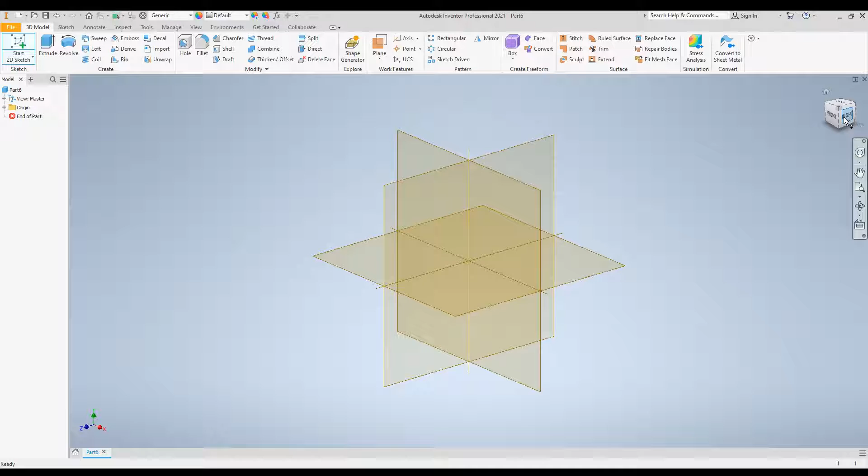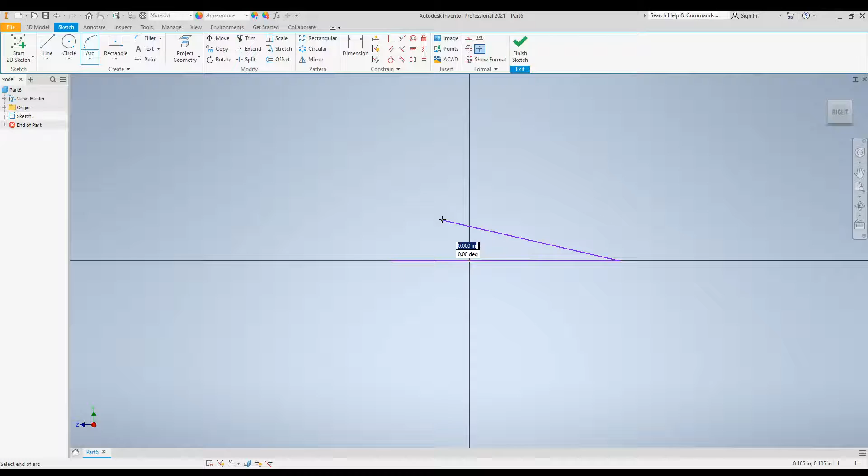I'm going to go ahead and open up a new part, and we're going to follow basically the first set of instructions from the previous video, picking the right or the side view for our starting sketch. And I'm just going to draw a quick side view of a zero camber on the bottom and a positive camber on the top, and I'm not using any particular dimensions because I'm just trying to get the overall shape here so that you can see it. Now when I finish the sketch, notice we just have like the side view.

Okay, now for a tapered or a swept-back wing, we're going to actually loft our extrusion because we don't want it to just go straight out from the center shape. We want it to gradually taper to the shape that we want on the other end. So in order to do that, we're going to have to actually make another plane to sketch on that is offset from the center where we're currently at. So to do that, we're going to come up here to where it says plane, work plane, and we're going to pick offset from plane.

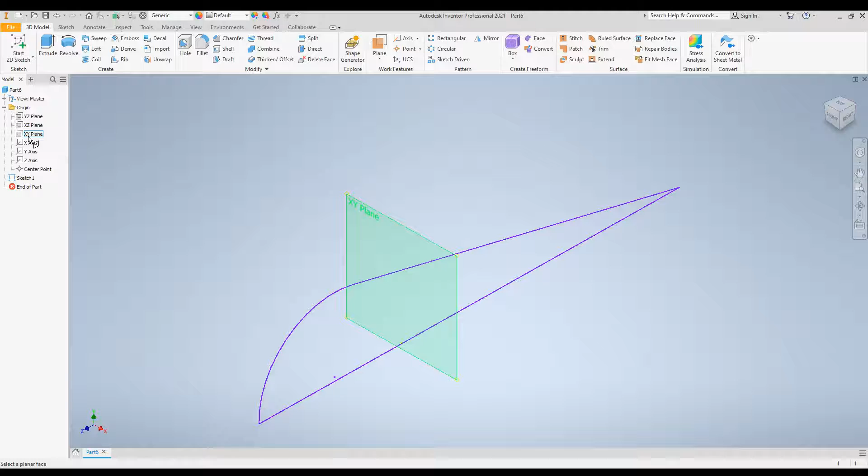Now to pick the plane that we're offsetting from, we have to open up the origin tool here and notice that each of the different planes has a link, a drop down, I don't know what to call these. So we want to pick the YZ plane, and you'll know that's the right one because when you look at how it's highlighted, it's the plane that we just drew that cambered surface on. You can also look down in the lower left hand corner and you can see a set of axes where they've labeled the different axes. So you can see that yes, for the side view, it's the Y and the Z.

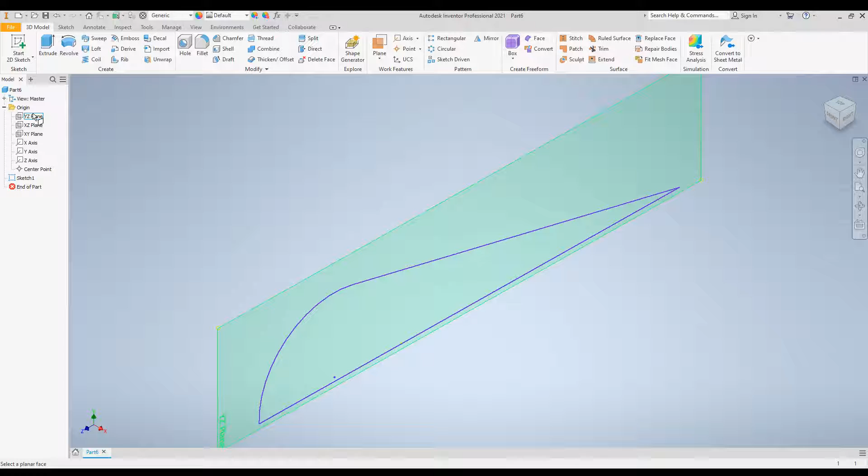So we're going to click on this little box in front of it. Notice that it highlights this thing in blue. And then it's asking us how far over do we want to offset this plane? So to figure that out, you've got to figure out what the distance is from the center of your wing to the very edge of your wing. So half of your wingspan. If your wingspan is 20, you're going to want to offset it 10. It's quick math, but you need to make sure that you're offsetting it correctly or your wing is going to be too short or too long.

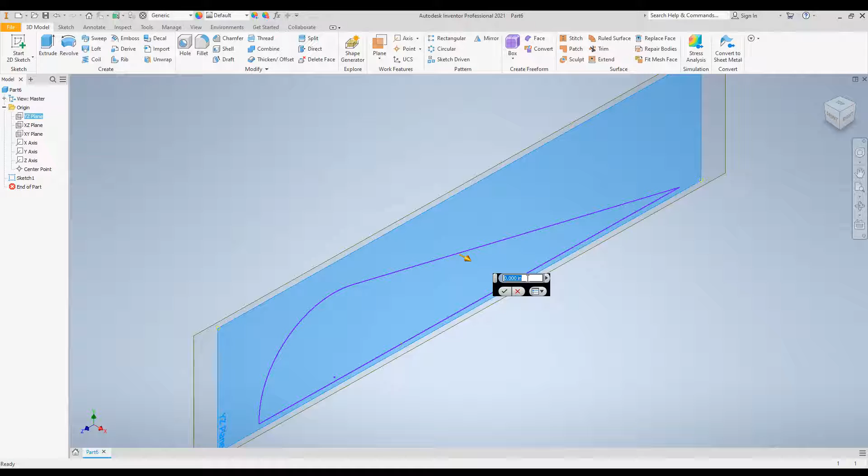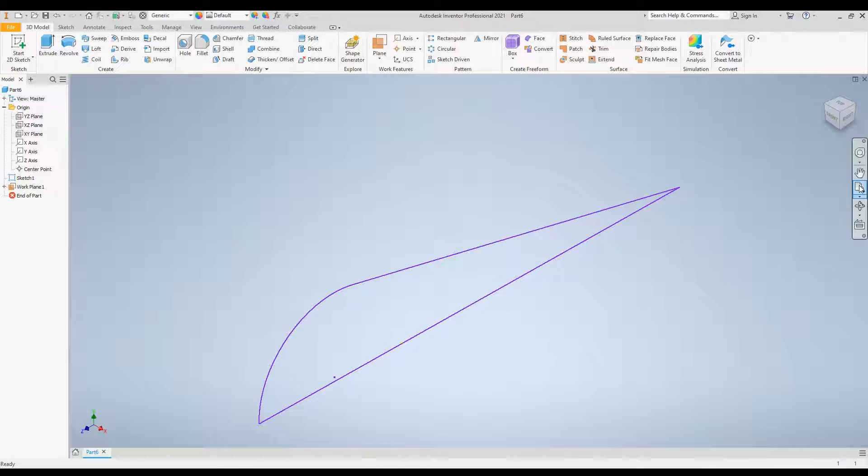So I'm just going to pick 5 cm as my offset. I'm making it up. Doesn't really matter. Looks like nothing's happened. Like, what the heck? I see my work plane here, but I don't see it in my screen. So if I click on the paper with the magnifying glass, that's the zoom all tool, it'll zoom out and show me, hey, your work plane's over here.

Okay, so now I'm going to start a new sketch, but I want to start a new sketch on that work plane. So there's 2 ways that I can do this. I can click on start a new sketch. It'll give me the little sketch tool, and then I just click the work plane and it would open up a new sketch for me like this. Or I can close that one. I can go highlight the work plane that I want and right click, and notice there's this little create sketch tool here. Either one of those is going to work.

So I'm just going to delete one of these sketches. I'm going to close this one. I'm going to delete this one just so it doesn't get confusing. All right, and to reopen a sketch that you already have made, you double click on the little box in front of it.

So if I'm tapering my wing, let me change the view here. I'm looking at the work plane, but because of the way it's oriented, where I'm looking at it straight through, it's showing me the cambering in the middle. So you can use that as a guide to figure out how you want your cambering to look

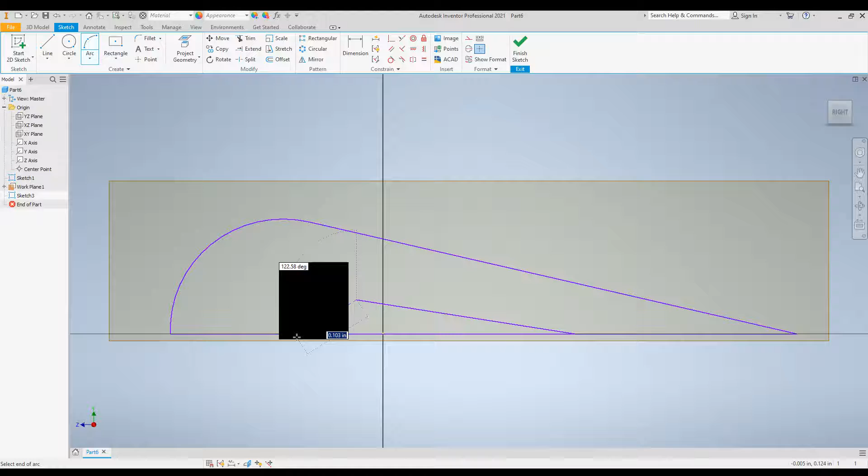There it is. Green. I'm just going to kind of follow the shape of my upper camber, and then I'm just going to do my little, where's the end? Can't find the end of my line. Oh, there it is. I didn't make it very long. All right, so this would be my second

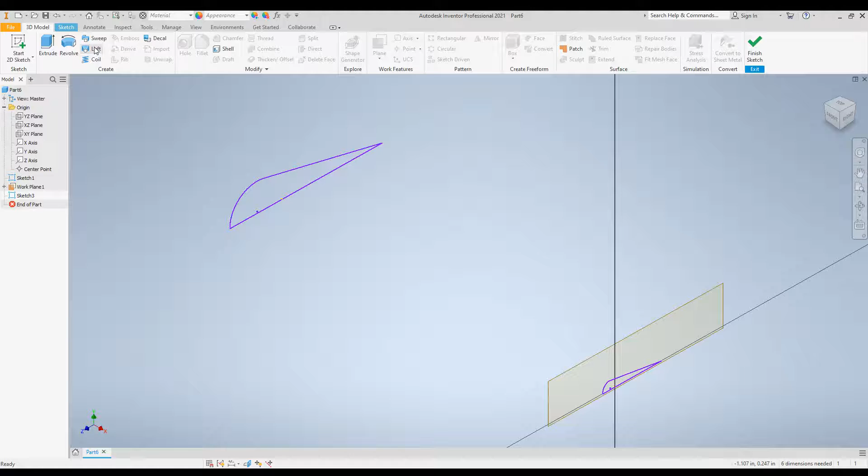surface for cambering. So I'm just gonna go out here so you can see this is the big wide one, this is the little tiny one here. So then to make that three-dimensional, I'll go up here to 3D model. I will click the Loft tool and I'm clicking in section. I'm going to click this as section 1, this as section 2, and notice it's essentially just building my tapered wing, going from that wider camber to this more narrow camber. So if you want to see exactly what it looks like, we can look at it from a top view.

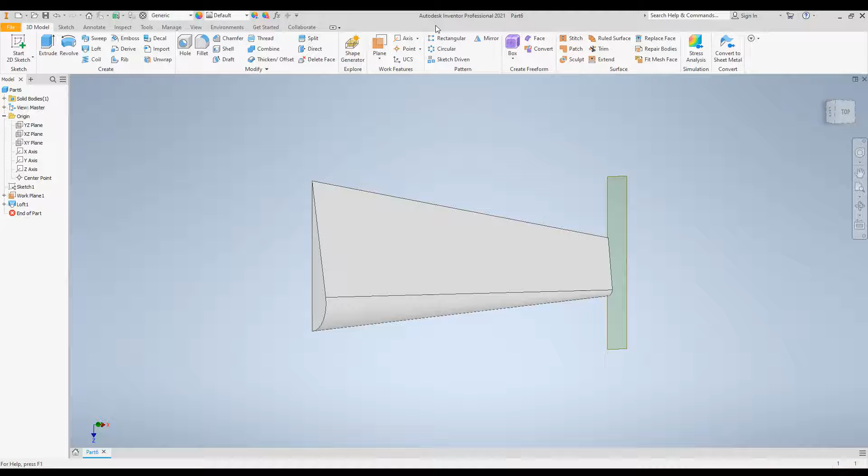Now, we can mirror this view to make the other half of the wing by clicking up here on the mirror tool, selecting the feature, which is basically the whole wing, and then clicking on mirror plane, clicking on just that cambered surface, then going okay, and then if I zoom out here, I'm looking at the whole wing. Now, that's tapered. What if you wanted to do swept back, or you want your tapered wing to be straight across at the front of the wing?

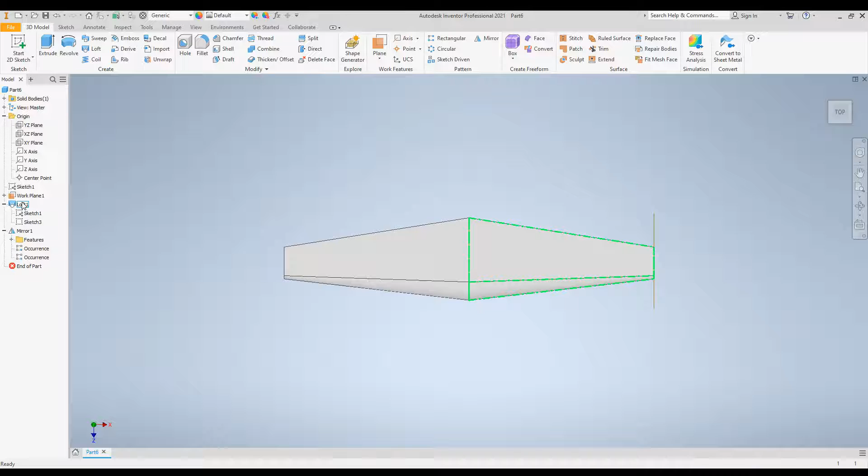So I'm going to go open my Loft. Open my Loft, there it is. So I want to change sketch number 3. That's the one down here on the end. And I'm going to flip it around so it's easier to see here. So let's say I want the front of my wing to be lined up. And why am I not seeing? Oh, because I have to undo my Loft, because I'm not actually seeing my other sketch there.

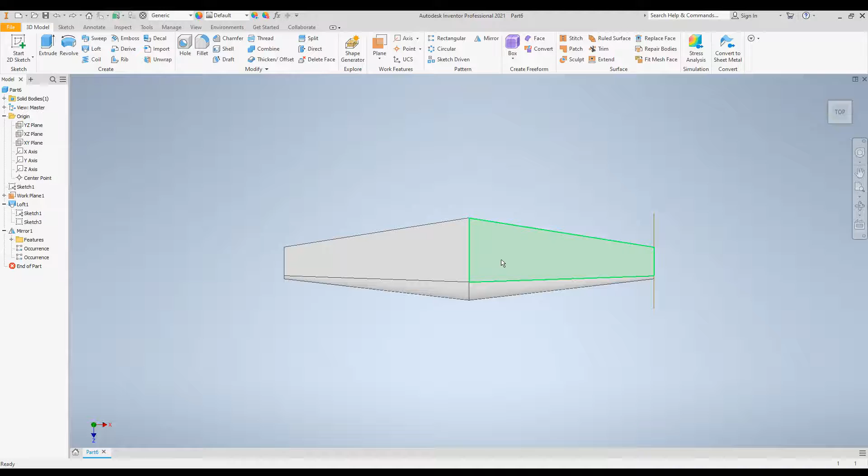So just delete these, so I no longer have that lofting. Oh, now it's telling me it's not going to do that. Or I'll just Control Z. Whoops, I got through. I'll put that back. Want to delete? Right click, delete. I don't want to delete the sketches. All right, there we go. Now I can go back to show you how to edit the sketch so that you can do a different

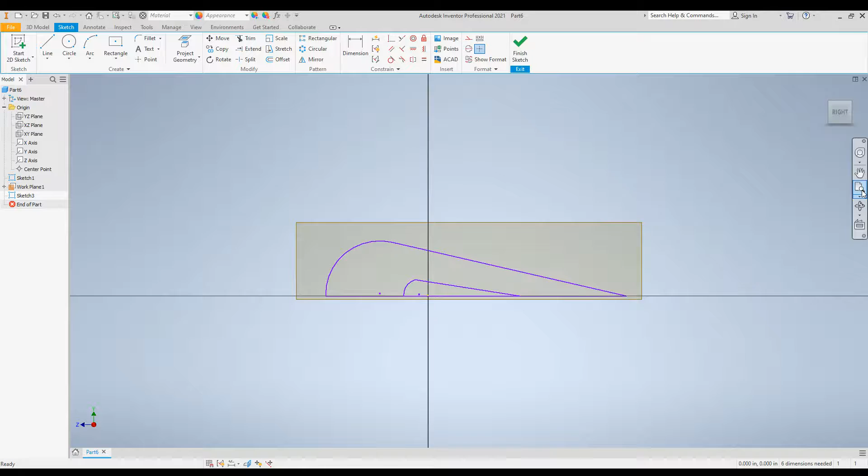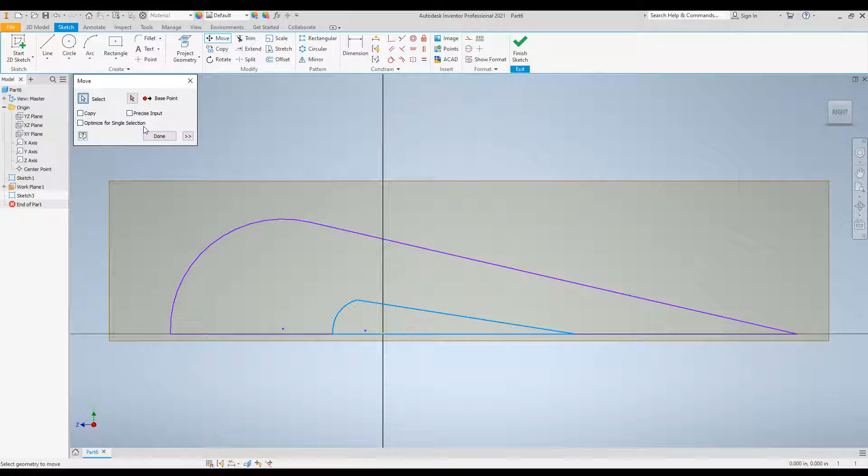style here. All right, so again, we were pretending that we want the front of the wing to be lined up, and then we want the tapering to go out to the edge of the wing. So I'm gonna highlight my wing here, and then I'm gonna use the move tool and select my base point to be anywhere, and then I'm gonna move this to the very front so that the front edges line up. I'm gonna click done. And now I'm gonna re-loft this. So go back to 3D model, click loft, click sections, pick my 2 sections.

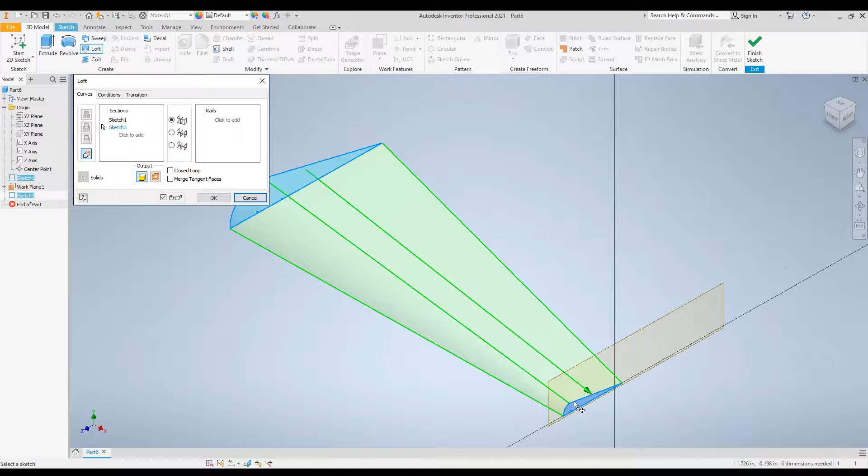All right, and then notice that now the front edge of the wing is straight and it tapers out to the side. So technically, I guess I drew this kind of upside down. I would have drawn it this way. And then you would mirror it the same way that we did before.

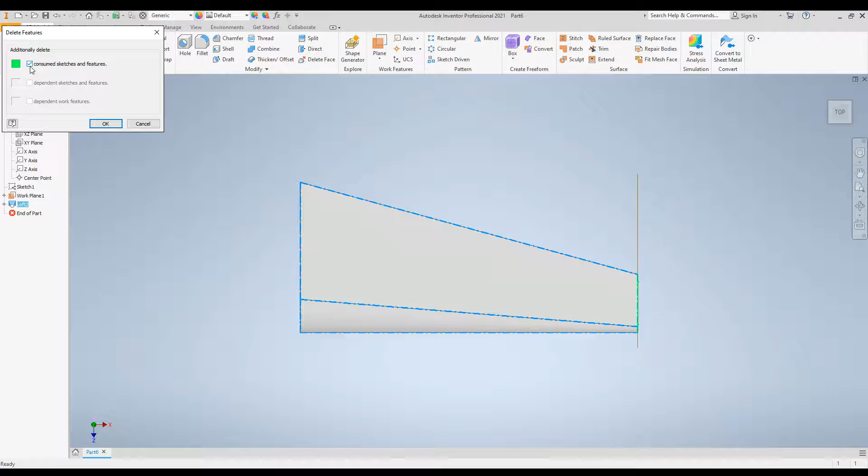All right, so let's talk about how this would look different if it were swept back. So I'm going to delete my loft again. And remember, when you're deleting the loft, if you want to keep your sketches, unclick that little box there. And I'm going to reopen sketch number 3 again, where I can see the other sketch behind it. Zoom in here. So now let's pretend like we are doing a swept back wing.

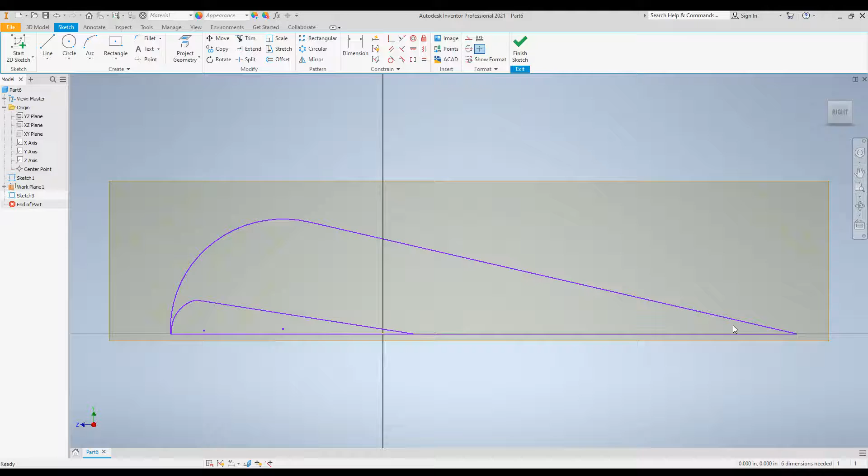So when we do a swept back wing, the rear part of the wing is often behind the front part of the wing. So it just kind of depends on how much you want to overlap. So I'm holding down the shift key and clicking on each one of my pieces. And again, I'm going to use the move tool, set my base point. I'm going to click out here this time. So I'm going to show you what it looks like if we put this all the way behind there. So I'm going to click done.

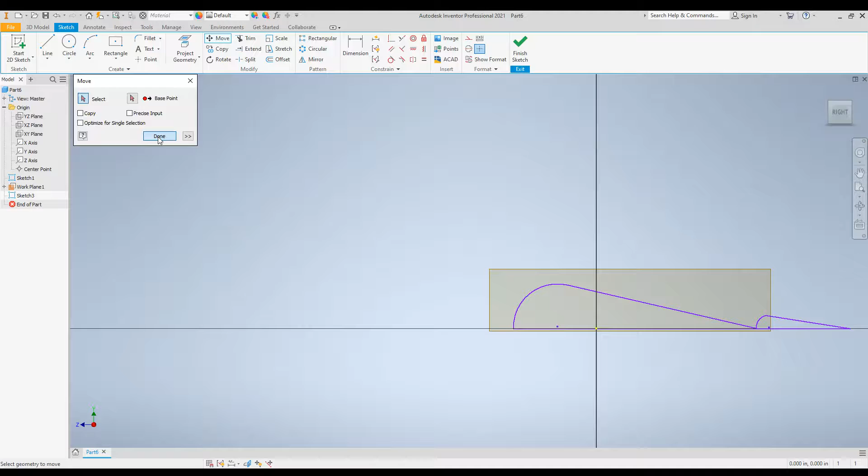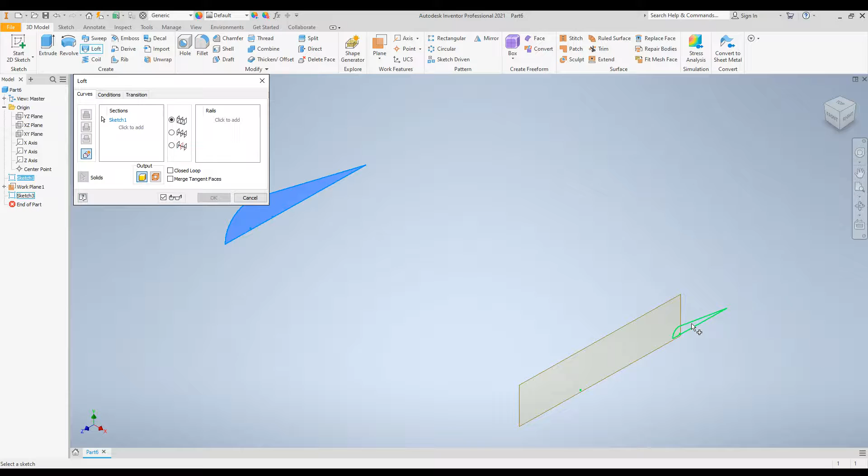And finish my sketch again. Go back to my orthogonal view. Now watch what happens when we connect these by lofting. Click on this one, click on this one and go OK. And now when we look at the wing, and I should flip it over. There we go. Notice now it has more of a swept back look. And obviously the further behind the wing you drag this other sketch, the more swept back it's going to be.

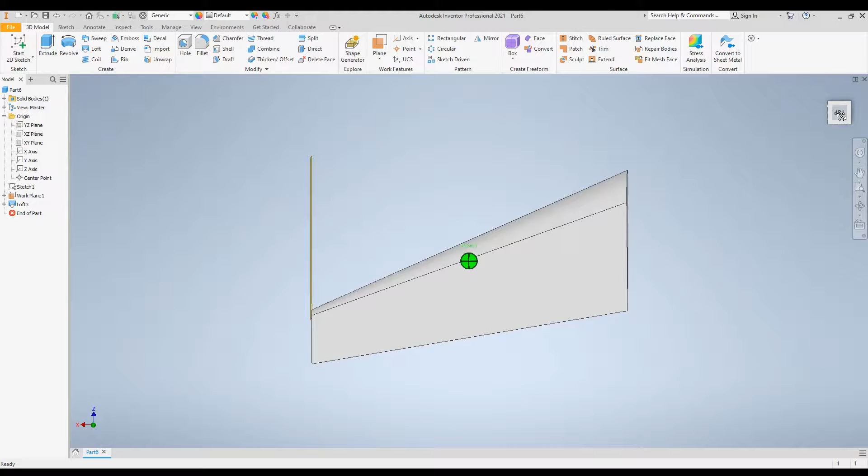And then just one more time to remind you how to mirror. Click the mirror tool, pick the surface you want to mirror, pick the plane you're mirroring it on, and then go OK. And then there we have our swept back wings. So tapered and swept back, pretty much you use that same kind of strategy. It just matters how big and where you end up putting that second surface.

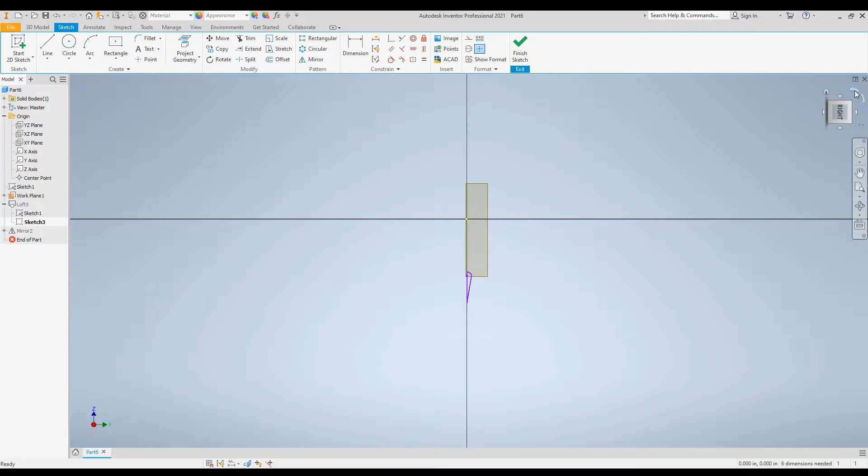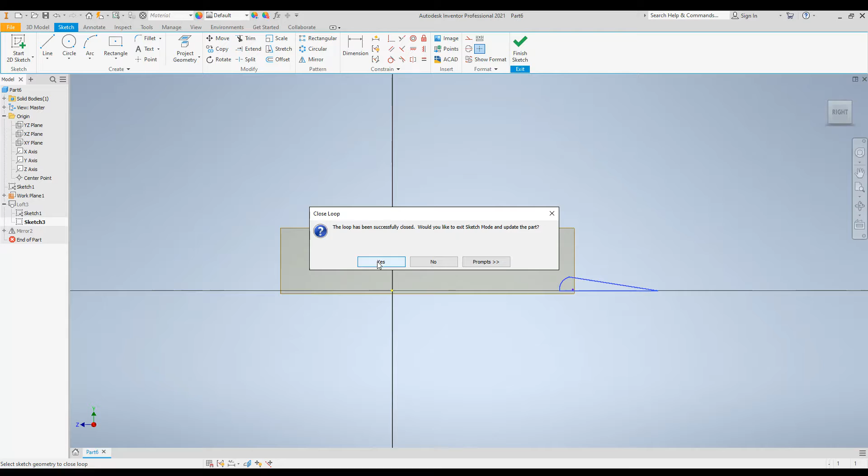Now, one more thing I just want to bring to your attention. So sometimes when you're trying to loft, it won't recognize one or more of your surfaces. Need to click in the right spot. All right, so if you click on a line, right click, and go to close loop, click OK, and then you're going to click all the other lines that close the loop and make sure that your loop is closed, because oftentimes it has to be a closed loop for you to be able to extrude between 2 points.

And so oftentimes if it's not doing that, it's because you don't actually have a closed loop. Those ends of the lines are not exactly the same. And if your loop isn't closed, then it will tell you that these two things aren't touching. You can also sometimes see that when you zoom in really close as well.

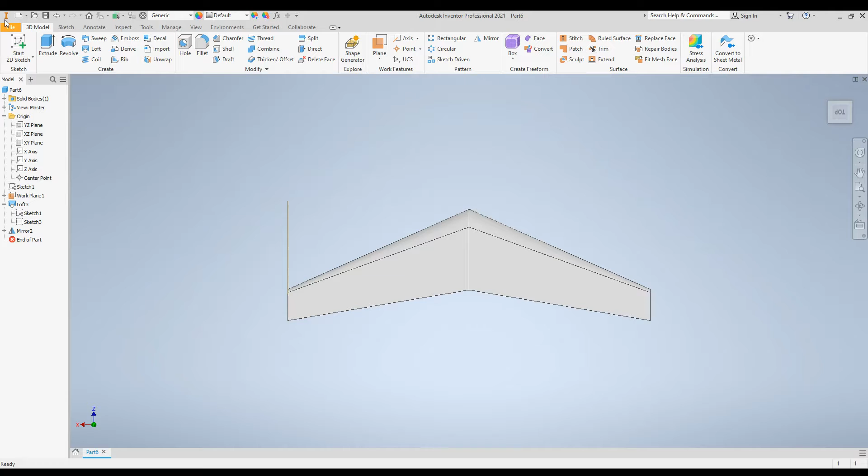So before you close this out, you're going to want to make sure that you save your completed drawing. On our school computers, it's going to try and access an auto file. It will give you a red warning, just click OK. It will do another warning, click OK. And then in the quick access, you're going to want to scroll all the way down and make sure that you're putting it either on your Google Drive or your H Drive.

So to sign into your Google Drive, there should be a little icon down in the lower right-hand corner that gives you access to that. For me, I just made myself a file called school stuff, and I'm going to call this Sweptback Wing.